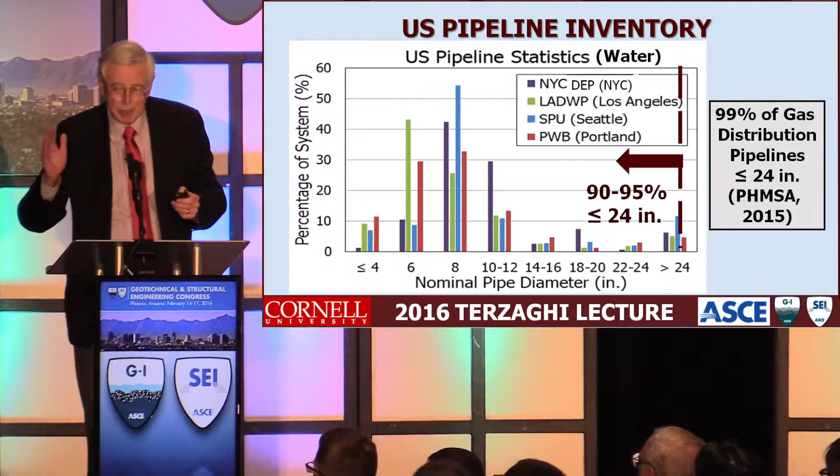Similar statistics can be gotten from the PHMSA, Pipeline and Hazardous Materials Safety Administration, and they have done statistics on the gas distribution pipelines in the United States - 99% of them are less than or equal to 24. The larger ones, of course, are some of the greater and more important ones, but just to get the statistics right and a sense for the composition of the systems, I thought I'd lay these out because we'll show how they become important later on.

Pipelines are part of a national challenge to be able to manage and understand and work with our infrastructure and to make it a better infrastructure.

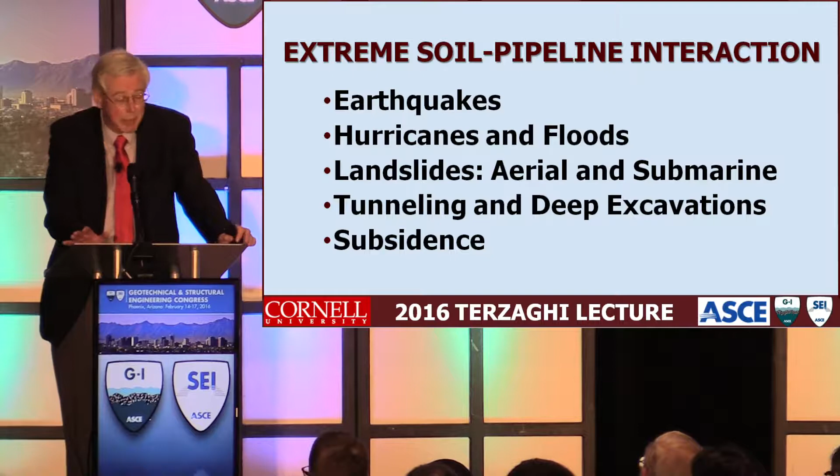We also have ground deformation effects associated with tunneling and deep excavations, and a whole variety of causes for subsidence. The work supported by the National Science Foundation and others on the effects of earthquakes and other extreme events on soil-pipeline interaction has value not only for extreme events, but also for everyday performance of pipelines subject to ground movements from tunneling, deep excavation, subsidence, and other disturbances.

So this kind of investment and activity goes a long way toward helping us understand and engineer better for what's underground.

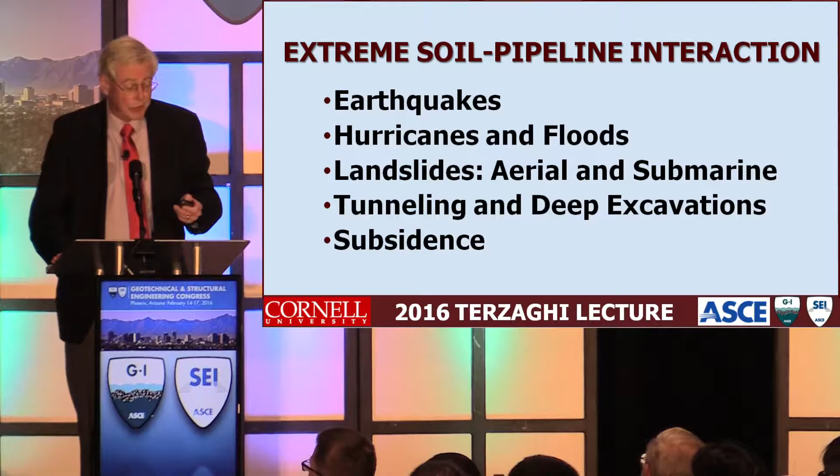Whenever we talk about extreme soil-pipeline interaction, two aspects automatically come to mind: material and geometric nonlinearities. This is a double-edged problem because we have material and geometric nonlinear properties for the soil, and simultaneously material and geometric nonlinear properties with respect to the pipeline structure. Probably the greatest challenge is the geometric nonlinearities, because when pipelines deform and the ground begins to fail along specific failure planes, you get complicated and complex behavior.

So I'm going to start on the technical part of this talk by looking at where the rubber meets the road, and that is where the soil and the pipeline meet.

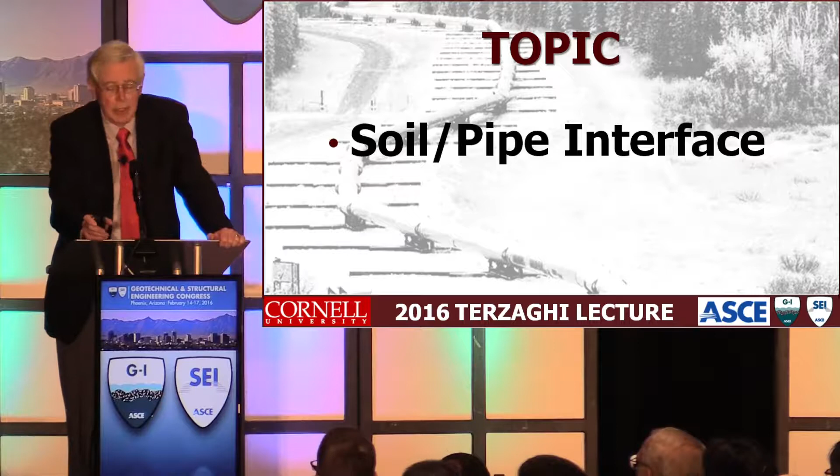We'll see some examples about that later. But they will eventually squeeze shut, and that'll be a function of what kind of pressure they're carrying. But often in an extreme event, we can't rely on the line to have pressure in it, because it could lose pressure from a variety of different operational or other failures in other parts of the system. So they really need to survive with low or zero pressure if they're going to maintain their integrity.

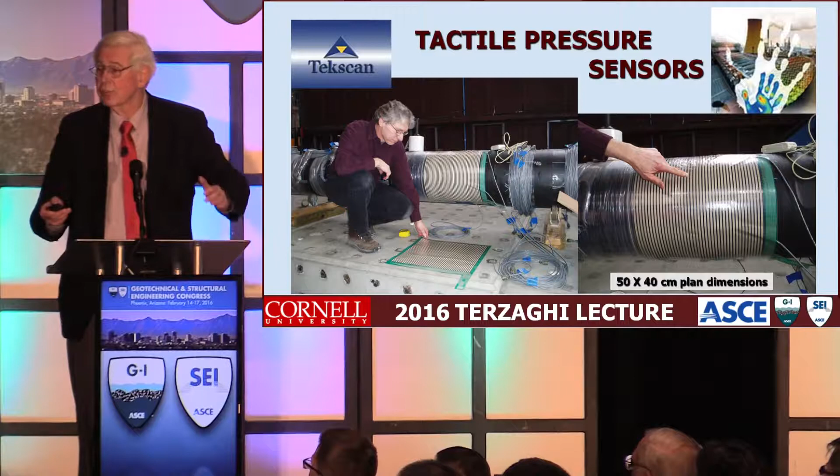These are electronic sensing units which will have voltage drops, which when we monitor them, we can come up with a pressure distribution and therefore actually measure the pressure distribution around nonlinear objects like pipelines under large ground deformation.

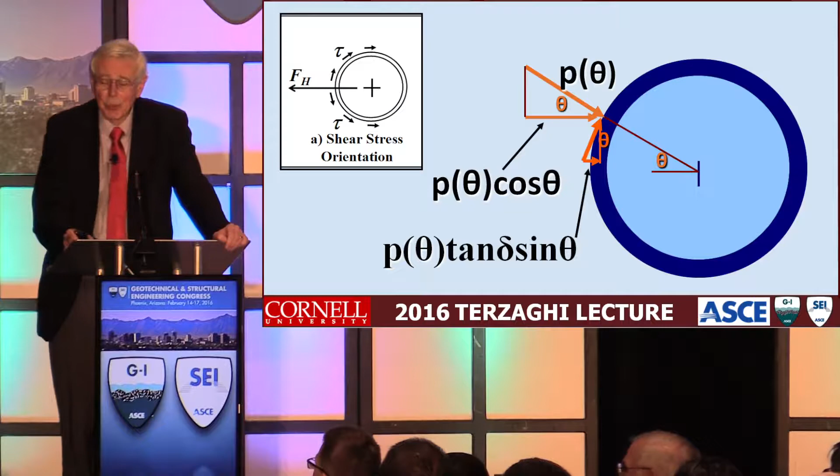And if you want to break that down into the horizontal pressures, then you have to decompose the normal force, which also generates a frictional force on that pipe. So there's a double decomposition to get the horizontal components, which is illustrated in this particular diagram.

You can integrate this. This is an equation that was originally developed by Mike O'Rourke, so I want to recognize him for doing that. We used it as our research team. It shows here you can integrate the horizontal components from those components which are perpendicular to the longitudinal axis of the pipe, from the normal force and also from the frictional force.

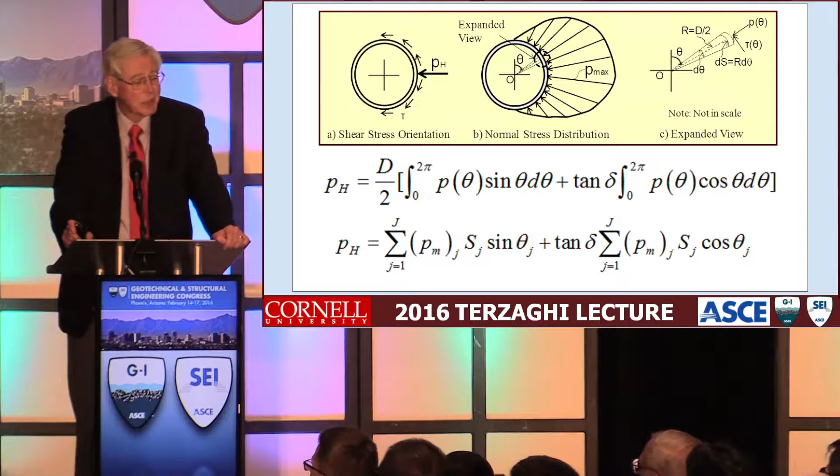And you can also do this in a numerical fashion by using the actual tactile pressure sensor data, which is the second equation there. And here's some examples of the pressure distributions that were monitored during some of these two-dimensional plane strain tests.

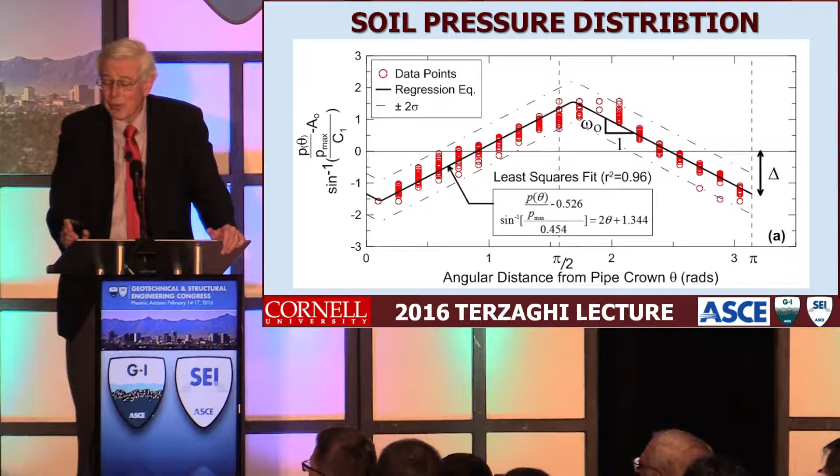What you can do with those data is you can take the data, you can put it into some form of regression that will fit the sinusoidal distribution of the data and be able to tag that with some moniker or metric of the statistical substantiation or stability of that. So we have an R squared of about 0.96.

You can see the black regression line. It's a very well-defined sinusoidal distribution. You can see the data ranges. We have about 17 or 18 different data sets shown in this particular slide.

And I think what's also quite interesting, and we'll come back to this later, is that there's numerical analysis that we've done. You can do the same thing with those. You can take the normal distributions to those and decompose them into the horizontal components. And they actually show a very good relationship too.

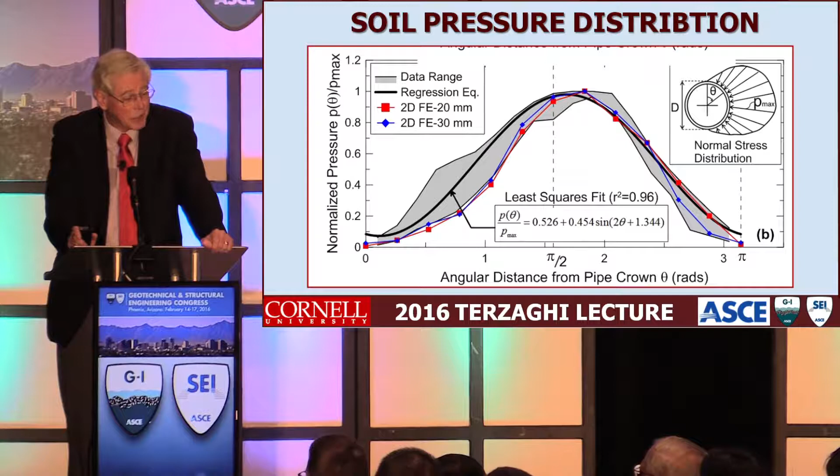So in this particular slide, what we've done is we've plotted the normalized pressure distribution. That is the pressure distribution divided by the maximum pressure, and you can see the good fit with respect to the sine function.

For lots of numerical reasons, when we roll these things up and do analyses, it becomes useful for us to be able to define what we would call an apparent frictional force, which would be generated by the horizontal force in this case, that P sub h, multiplied by the tangent of delta, where delta is the angle of soil-pipe interface friction, rather than to do the stress normal to the surface.

We have two ways that we can decompose our forces. We can decompose them perpendicular to the longitudinal axis of the pipe, or we can decompose them perpendicular to the surface of the pipe.

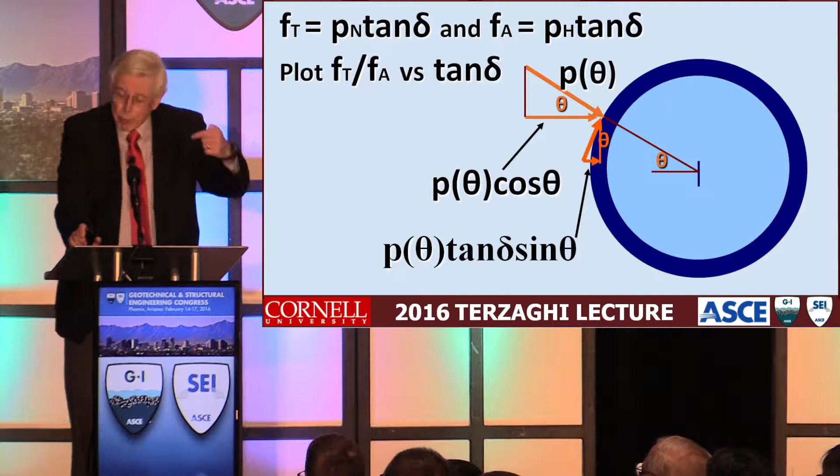But it's the one that decomposes perpendicular to the surface that generates the frictional resistance longitudinally. So if we want to couple all of this stuff, this is the way you couple it. You look at the relationship between the actual friction, which is longitudinal, that's F sub t, and the apparent friction, generated by the forces perpendicular to the longitudinal axis, and we can plot those because we've measured them very precisely, and this is the transfer function that you get.

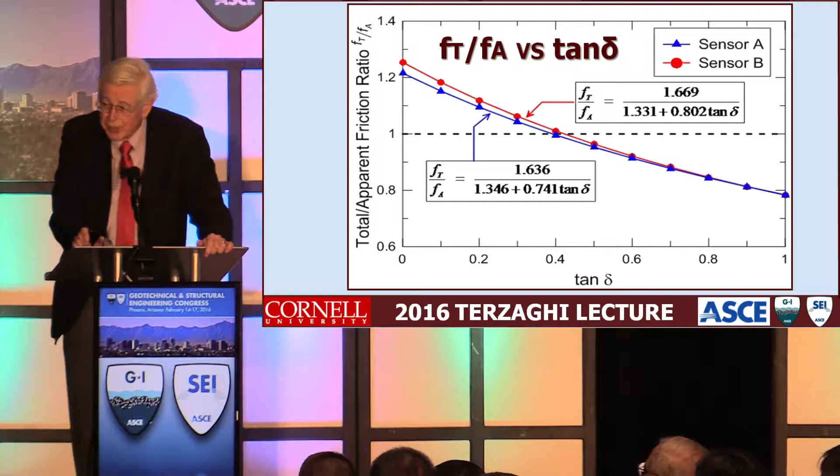You can use this dimensionless value, plotted as a function of the interface friction angle, and you can see that if you're testing a high-density polyethylene pipeline, which has a tan delta of around 0.4 or 0.5, you don't need a correction. The two are virtually identical. But if you're looking at a pipeline with a very high delta, close to 1, that's a very rough surface, and you're going to be overly conservative if you use the horizontal force to evaluate your friction.

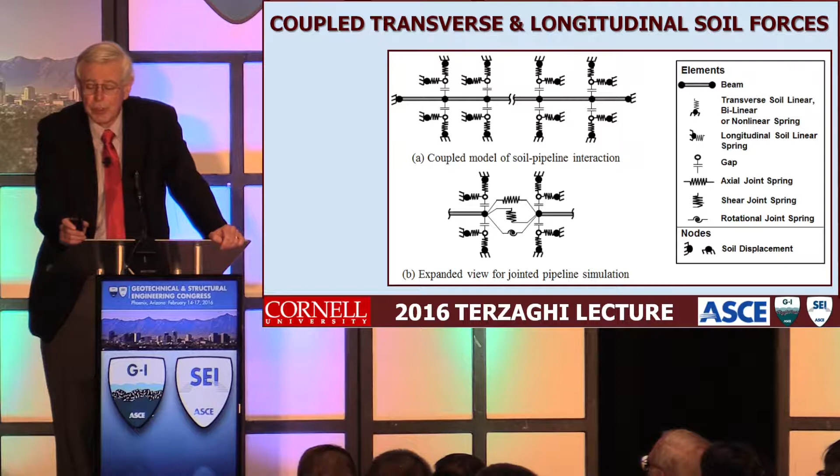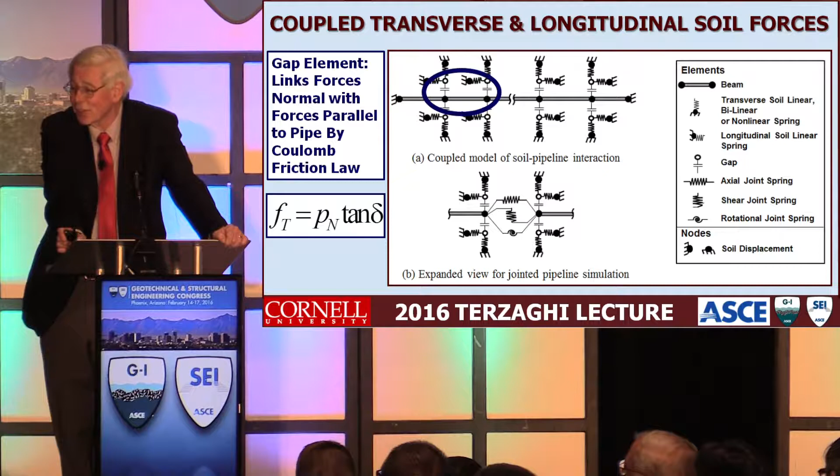So the first thing we learn from this ability to look at the interface, where the rubber meets the road between pipe and soil, is that we need to account for the coupled transverse and longitudinal soil forces. In the Terzaghi paper, we'll talk about how you can do that in Abaqus. Basically, you create gap elements linked with force relationships between the pipe and soil, perpendicular to the longitudinal axis of the pipeline. You couple it by virtue of the true friction normal to the surface of the pipe, so now you are truly accounting in two dimensions for the coupled forces perpendicular to the longitudinal axis and the frictional forces that develop longitudinally. If you don't do that, you will not have the right answer, and you can be very far off and unconservative.

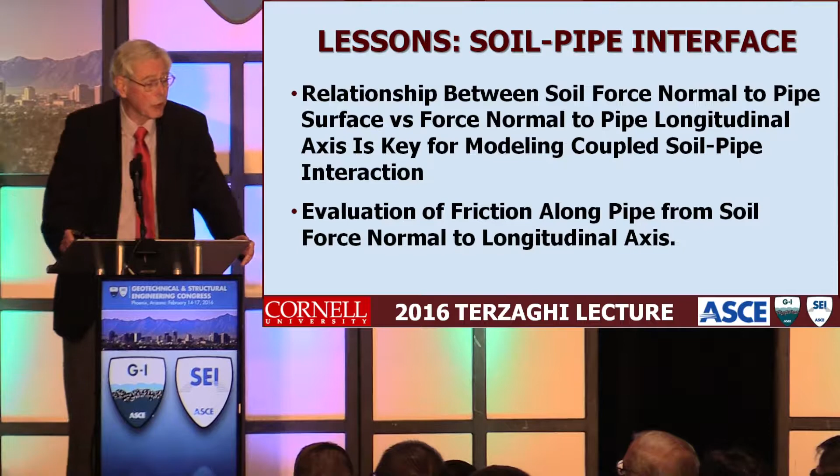So, first lesson: the soil pipe interface relationship between soil force normal to the pipe surface versus force normal to the pipe longitudinal axis is key for modeling coupled soil pipe interaction, and the evaluation of friction along the pipe from soil force normal to the longitudinal axis. We have provided a way to account for that.

Next topic is soil pipe interaction, pipeline interaction. To deal with this, we have a number of different ways. We can look at the pipe as a beam, a kind of quasi-L pile in a horizontal direction, and characterize interactions. I don't want to call these springs because they're far more complex now. They're nonlinear, they can account for strain softening behavior. You can pack a lot of detailed soil structure interaction into these, or make it very simple as a spring. We have the capacity to go far greater and do a much more sophisticated job, replicating very complex interactions in the pipe and in the soil.

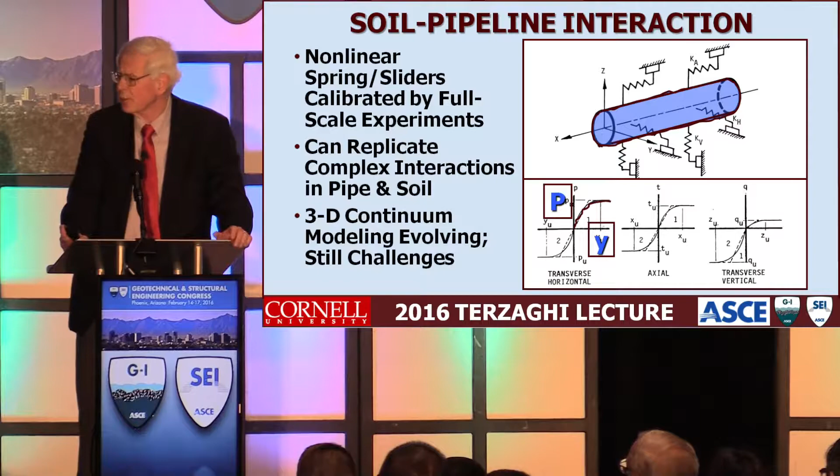And then there's also 3D continuum modeling, which is evolving. There are still challenges, but there's been extraordinary progress made in three-dimensional modeling too. This is a summary slide, putting some of this into perspective. It's obviously selective, not recognizing some good work from some good people, but given the time I have available, I'll illustrate some of these things.

We can actually look at the pipeline not as a beam, but as a shell. So you have shells which can be connected to these soil pipe interaction relationships, shown here by those graphics attached to the shell.

And then there are a number of very interesting works. Our colleagues at RPI and ourselves, with Xie et al., a paper in EERI in 2013, looked at a variety of different ways of modeling three-dimensional pipelines in solid soil conditions, modeling the pipe as a shell element and the soil as a solid. Recent work by Robert et al., work we did with the folks at Cambridge, Kenichi Soga—Dilan Robert is a professor at RMIT in Melbourne, Australia—looked at a variety of three-dimensional shell modelings, and some excellent work by Vazouras in Greece, looking at three-dimensional soil pipe interaction conditions.

When we characterize the strength of soil, we've always liked to use direct shear tests. That's because we're interested in two-dimensional plane strain reactions where we can get very good experimental data to validate what we're coming up with numerically. When you run a direct shear test carefully, you recognize that the direct shear relationship between shear and normal stress is not the plane of tangency to the Mohr circle.

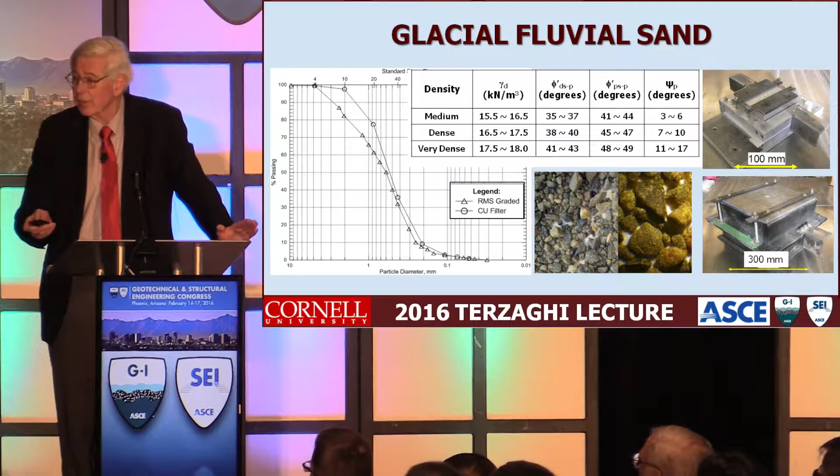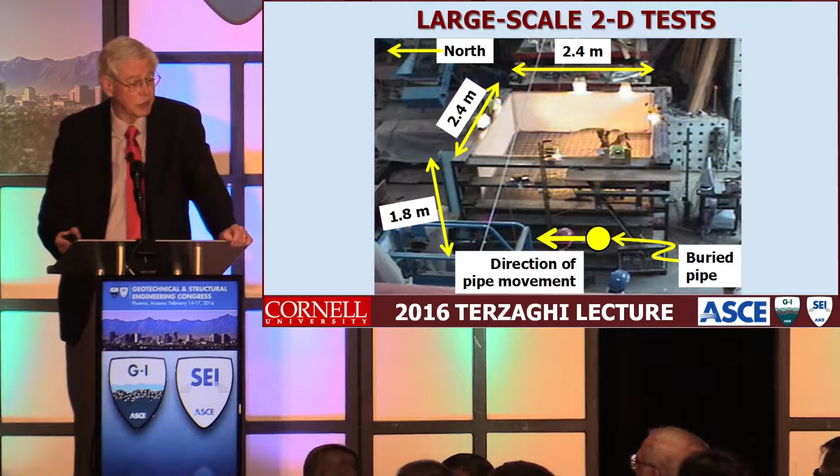That's because these are the kinds of soils we looked at—fundamentally, but still with specific characteristics, which you see on the screen. We developed two-dimensional models for these plane strain tests that we ran. This is just showing a picture of one of these plane strain tests.

Our analytical model worked off a Mohr-Coulomb yield surface. It had a strain-compatible modulus, and we also had a special subroutine for strain softening from peak shear, so it could account for strain softening situations.

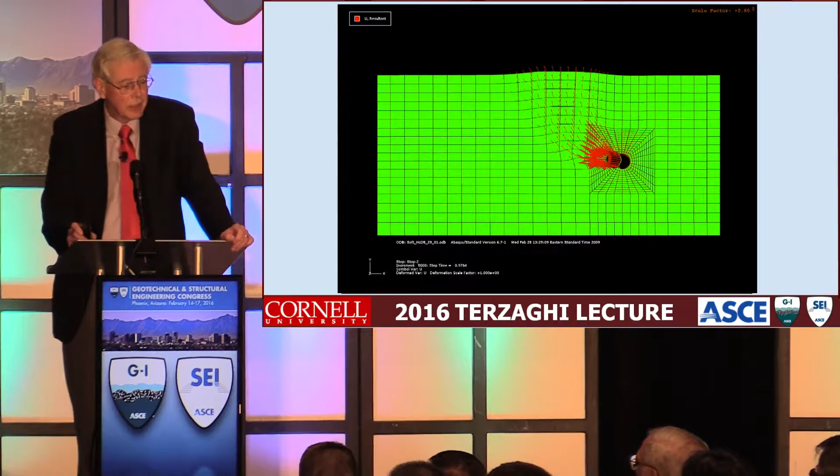In the next slide, you can see simulations with the pipe being pulled laterally through the ground. If we freeze that and look at the testing, the pipe pulls away from the soil in the analysis, and also in the tests, leaving a void—particularly when we're testing with partially saturated soils, which are really the right representation for the soils we account for in practice.

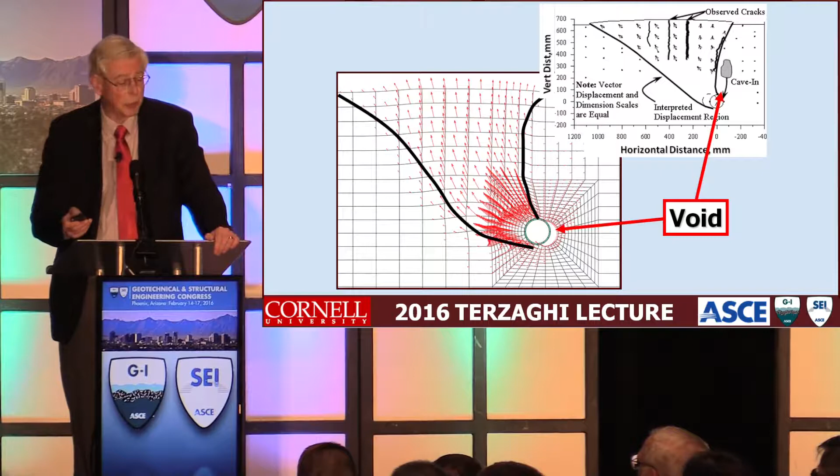When we compare the analytical results with experimental results, there's been excellent agreement, not only for tests associated with lateral pipe-soil interaction, but also vertical upward pipe-soil interaction—even to the extent we've developed an auto-remeshing approach that accounts for the pipe moving up in the soil as it begins to punch out of the ground, the reduction in vertical force, and how the relationship between pipe force and displacement should look.

So we can roll these up, and these have been published in various journals, including the Geotechnical Journal, Geotechnical Geoenvironmental Engineering Journal, and the Canadian Geotechnical Journal. And we can show these dimensionless forces, which are the forces we measured, divided by the unit weight of the soil, the depth of the center line of the pipe, the diameter of the pipe, and the length of the pipe.

And if we take the length as a unit length, you can get the force per linear distance. And we plot these relative to a dimensionless depth, which is the depth of center line divided by the diameter, and can come up with relationships that allow us to predict what the maximum forces are going to be on the pipe.

Now, there's something really interesting in this picture, particularly the one on the left, because what you'll see in that orange line are the partially saturated tests we performed at Cornell, along with the dry soil tests. And for the same soil with the same dry density, you can see that the partially saturated medium dense curve is higher than the medium density dry sand curve.

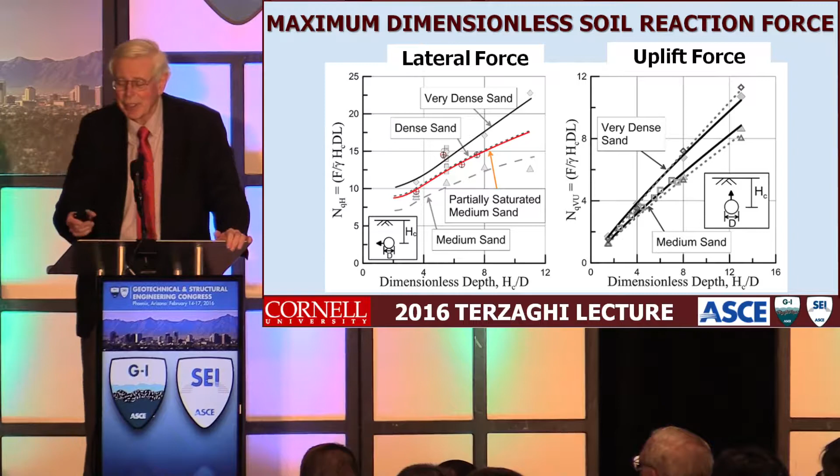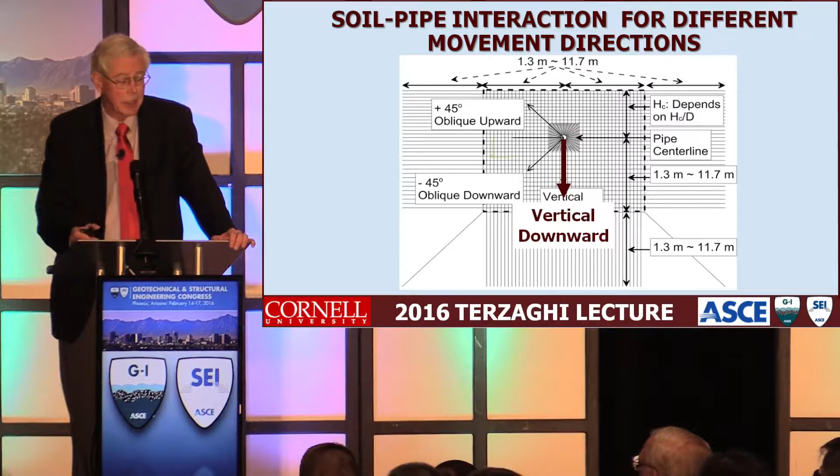We can go further with this model, having validated it in the two directions we've tested intensely and feel comfortable with the model. We now can look at pipe-soil interaction in the vertical direction downward, in the oblique directions. We can do a full 360-degree sweep to be able to come up with a characterization of the soil-pipe interaction for any direction at any depth in the soil. And that's what we did.

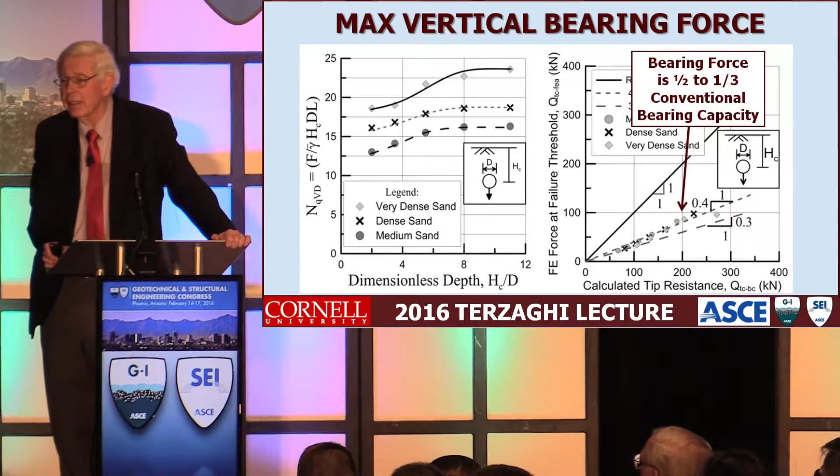We started off with the vertical, and when we ran the vertical, you can see on the left-hand side the dimensionless force plotted with respect to the dimensionless depth for the vertical reaction, and then we also could compare that vertical reaction with the conventional bearing capacity equations, which are very often advocated and used in design. And we did that. We found out that systematically the actual forces we were modeling were less than what's given by the conventional bearing capacity formulations.

And I must say that these are partially verified experimentally, and that's by centrifuge test, and certainly make good sense to us from a numerical simulation point of view, but this is an area where we could actually use some large-scale validation also to finally close out this particular pursuit.

However, taking that, which is interesting, we also can look at the oblique soil pipe interactions. These are 45 degrees downward, 45 degrees upward. And we actually could run through all of these different orientations numerically, and we can characterize the force generated as a maximum against the pipe for any interaction mode. That's what that I sub m stands for in that equation.

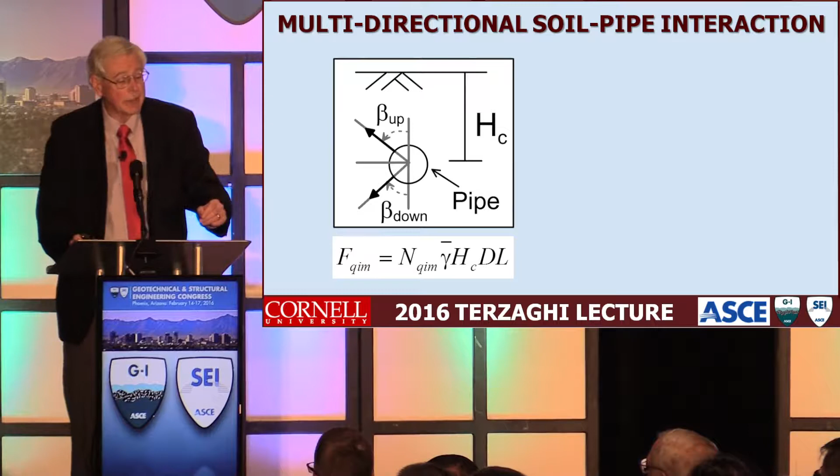And we can characterize that by virtue of this dimensionless number, this N sub q i m, multiplied by the effective stress unit weight of the soil, the height or depth to the center line of the pipe, and the diameter of the pipe. And what we found, if you look at this, for example, as a sort of random orientation, is...

We actually can account for it in an equation, and this equation actually comes from work done by Ken Nyman, who borrowed this from Meyerhof. You actually only need to define the force on the top of the pipe, that is the vertical upward, the lateral, which is the same in both directions, and the base.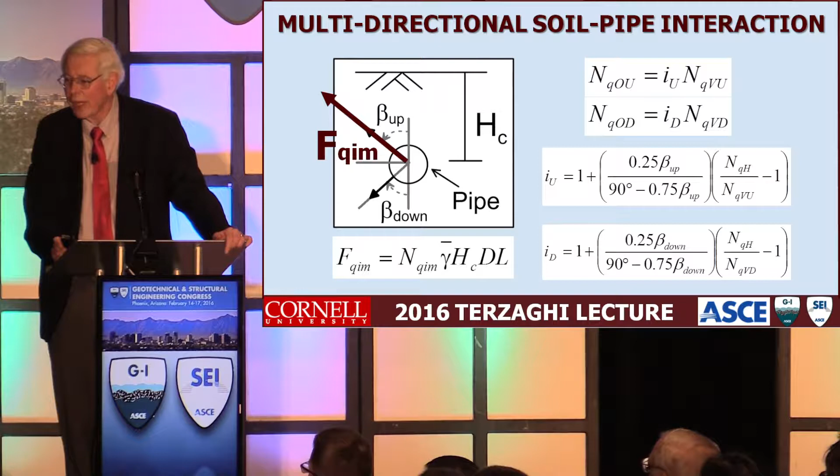And by these equations, you can account for the variation in maximum load 360 degrees around the pipe. So you even can boil this down to a set of very easily manipulable equations by just knowing what the reactions are at 4 points around the circumference of the pipe. And that's really a significant recognition.

These are showing a kind of summary of these analytical results for the ratio of the N sub Q, that is the reaction, dimensionless reaction number for the pipe in any direction, normalized by the horizontal, because we have so much good horizontal data from the large-scale tests. And what you can see over on the left-hand side is the 360-degree plot of that ratio.

And you could see when the dimensionless depth is shallow, so that HC over D is 3.5 in that upper left-hand corner plot, you can see that it's a very asymmetric distribution, 360 degrees around the pipe.

Because you're so close to the surface, the uplift force is very small when normalized with respect to the horizontal, and the vertical is still pretty high. But as we continue to go deeper through the soil, by the time we're getting to depth-to-diameter ratios of around 30, you're getting into a circular uniformity.

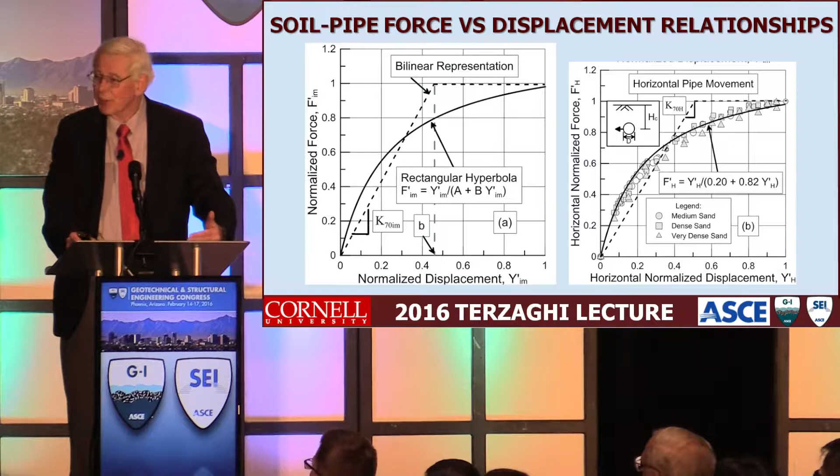At depth, you should not be able to distinguish horizontal from vertical. So we have the opportunity now to have a comprehensive methodology that looks at the interactions in the full 360 degrees. We also can characterize the force-displacement relationships using rectangular hyperbola. That's a great way to fit nonlinear things, and we use it all the time. In the Terzaghi paper, you'll see we've provided equations predicated on this rectangular hyperbola to characterize the force-displacement relationship as well as the maximum force in any given direction at any given depth.

Now that brings me to soil suction. We depend upon soil suction all the time for the stability of the ground, because if everything was dry, we would have just the friction we were supposed to have, right? But really, what happens is we live in the vadose zone. Many areas will have partially saturated or unsaturated soil conditions, and that apparent cohesion keeps things going. It's when that breaks down that we get surprises, and we get landslides and things of that sort at times. That works to our benefit, but when we're characterizing the reaction between pipes and soil, it works to our detriment because it adds to the resistance.

So the most recent work we've done with our colleagues at Cambridge, with Dylan Robert and Kenichi Soga and others, allows us to develop a simplified way to account for the effects of suction. I'm going to show it to you in this colored chart. On this chart are the class 2 and 3 boundaries of fill in the ASTM recommendations or standards. So if you're using class 2 and 3 fills, which are specified for burial of pipelines, those are the black lines. As the grain sizes go from left to right, your potential for suction goes higher.

Now what we did in our models is define it for the degree of saturation and maximum suction. I don't know what the degree of saturation is going to be for your pipe in the field, so we defined it as a maximum to get the worst case, and then you have to use some engineering judgment or additional evaluation from there to account for the suction effects. But you should never neglect them.

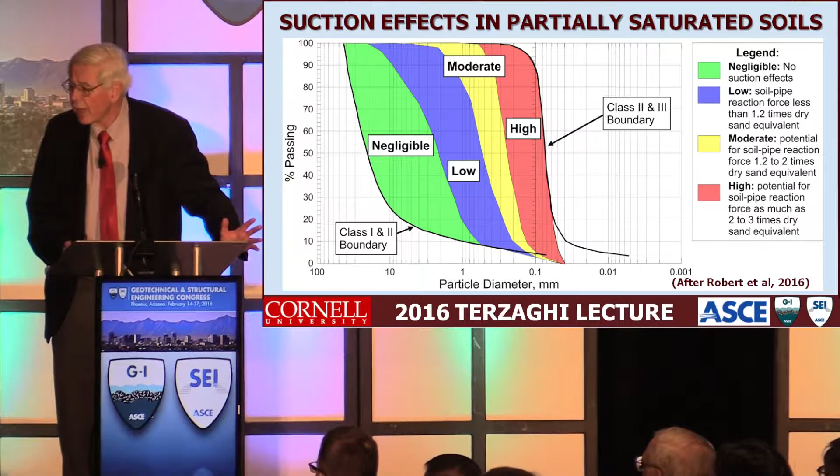For example, if you look here, if we go to the low zone, in this case the soil-pipe reaction force may be 1.2 times higher for the soil suction conditions. Going over to that red zone, it could be 2 to 3 times higher. One of the practical benefits from this curve is that if you go to the left of the blue zone, none of that develops suction any higher than a dry sand, so you don't need to make any corrections. If you want to dig a trench with sloping sides and fill it with material that has those characteristics, you're not going to get suction effects. If you get into the finer grain size, you do need to consider suction and take that into consideration.

This leads us to a design chart where we specify various characteristics for the pipe, and we ask ourselves, given the dimensionless depth, does the pipe size have any effect? And of course it does. Because if you were to take a depth-to-diameter ratio of 2, and you were to have a 1-foot diameter pipe, you'd then have a depth for that pipe of 2 feet. If it was 6 feet, it would be 12 feet.

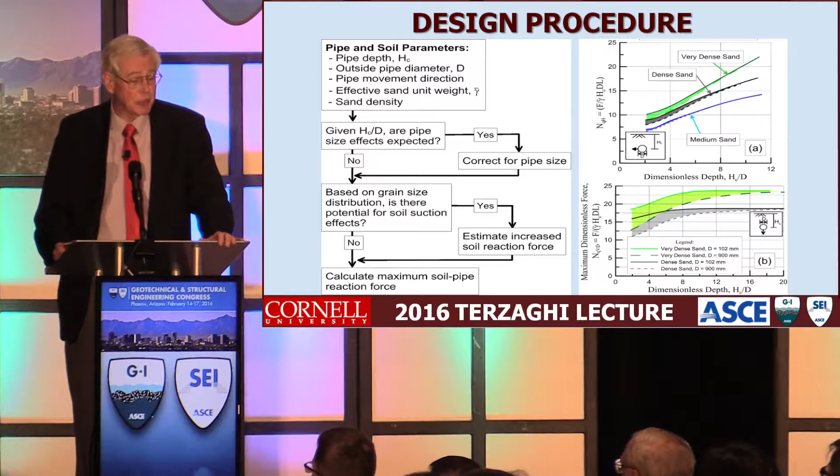The confining stress with depth suppresses the angle of dilatancy, and therefore your peak shearing resistance will decline. Our model accounts for that because through direct shear we break this down into the angle of dilatancy components for different levels of stress, and those corrections are shown on the graphs I'm presenting here. In the upward direction we don't see the effect. For the downward direction we see a significant effect, and for the horizontal it's important to consider many times.

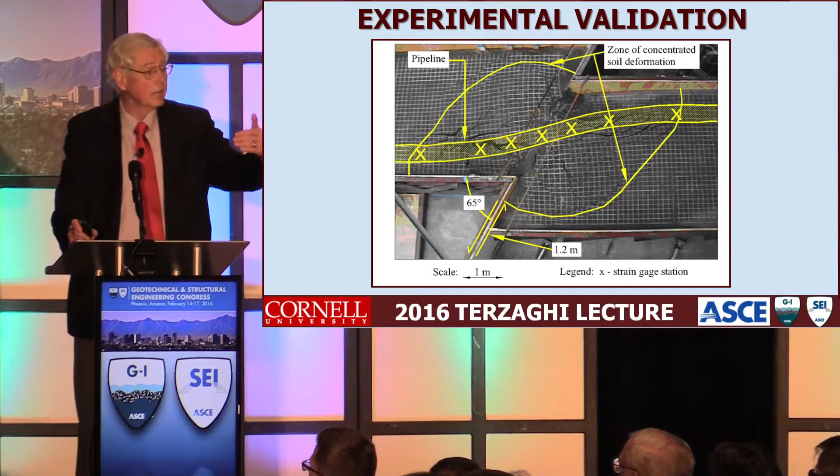So now we go back to taking this model and looking at it from an experimental validation perspective. If we look at some of our large-scale tests of a 250 millimeter diameter high density polyethylene pipe.

What I'm showing here are the measured experimental results relative to the analytical results if you didn't consider the coupled soil friction normal force relationships. That is, if you just took the K0 conditions that are in the pipe prior to the ground rupture event, you can see that they are under-predicting.

These are left lateral strike-slip fault experiments, and they generate a lot of force normal to the surface of the pipe, amplifying the friction where that normal force is occurring. When you couple the two, you properly account for that amplified friction and therefore the strain attenuation that has to occur at the center of the ground rupture.

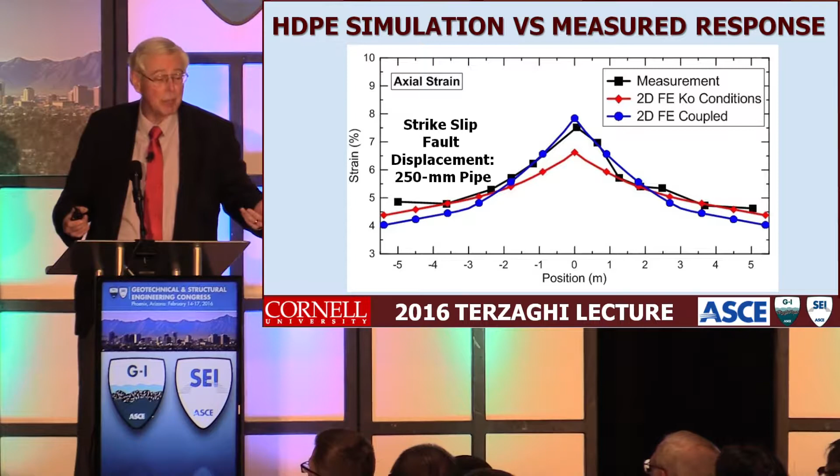Again, you get a good agreement between the measurements and the actual analytical results.

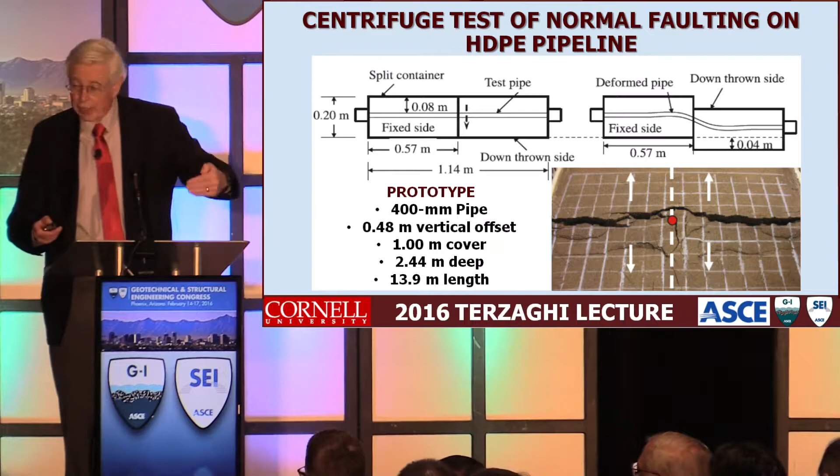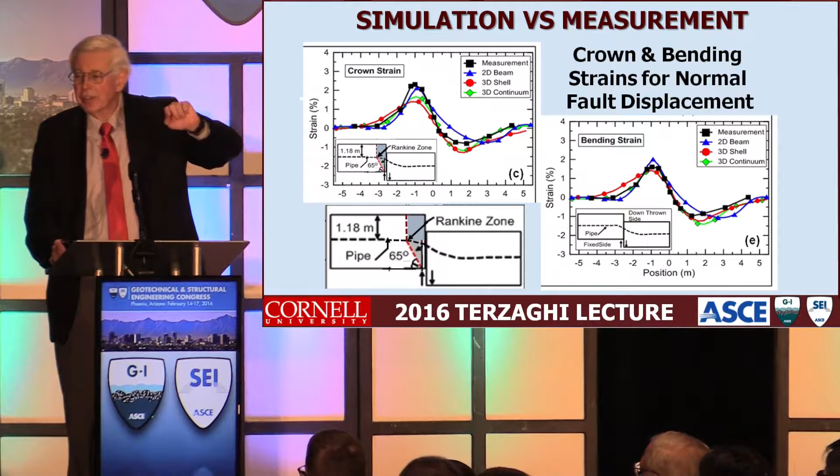We also looked at the fault displacement not as an abrupt movement, but because when you develop a Rankine zone there—anytime you have a normal fault, you're getting an active condition as the down-thrown side moves relative to the up-thrown side—if you distribute your movement across that zone, consistent with the photograph we just saw, you get excellent agreement from the two-dimensional model that compares very well with the three-dimensional analyses shown and presented in that paper.

So, lessons on soil pipeline interaction: we have an integrated methodology for soil pipe interaction for all pipe movement directions and depths, where the height relative to the diameter—not the diameter relative to the height—is greater than...

There's always a typo somewhere, always. I hope this is the last one we see. That should be HC over D.

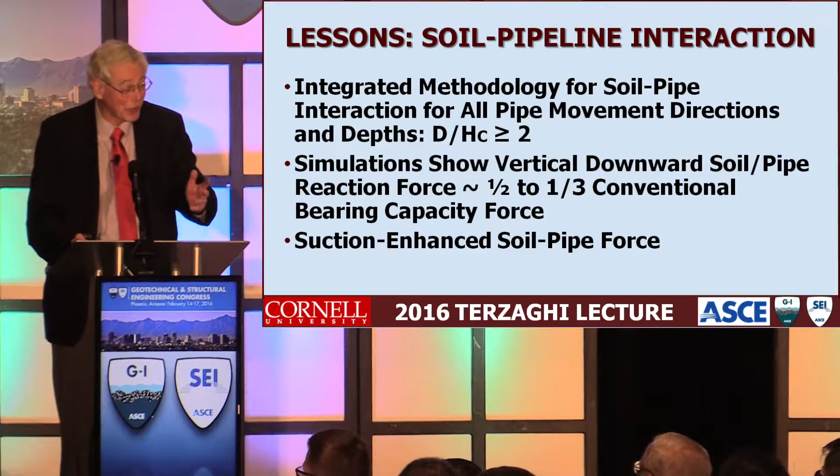So simulations show that vertical downward soil pipe reaction forces are about one-half to one-third the conventional values. That's a very important observation. And of course we have to account for suction-enhanced soil pipe forces.

Now there's a very interesting issue about when we can use two-dimensional analysis and get great results, and when we can't. So we took the knowledge we had from our pressure distributions and tactile pressure sensors, and we created a simply supported beam from a number of pipes evaluated as shells, applying that pressure to it as a proxy.

When you actually have soil pipe interaction, the pressure is not a following pressure—it's an intermediary pressure as the soil struggles with the pipe to create some interface pressure at every aspect of the deformation between the two. But in this case, we're looking at it as a following force, because if it becomes unstable under a following force due to lateral or transverse deformation, we clearly have to worry about the three-dimensional aspects of things.

So we looked at steel—specifically X52 steel, which we've studied and used because the pipelines at LADWP are fabricated with that material, and we have a great relationship with them. We also looked at cast iron, because pipelines in urban environments are affected, and cast iron is the most fragile and most problematic. You can look at these cast iron pipelines, again, with a rectangular hyperbola.

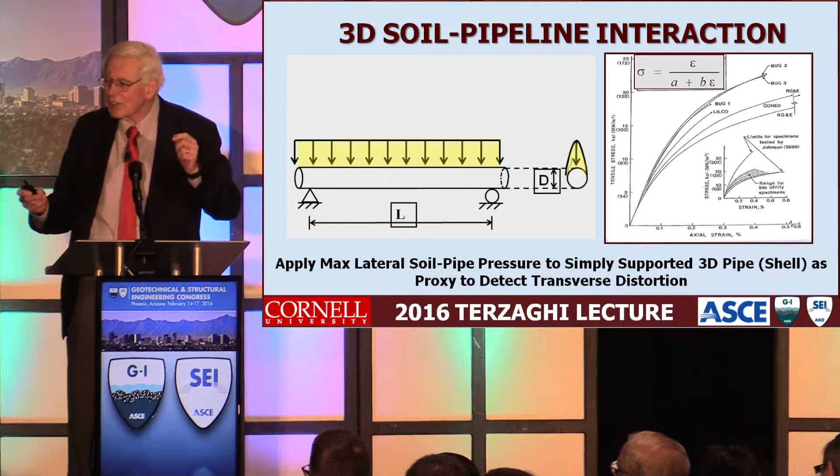When you look at cast iron, even though it's brittle, you should look at it as strain-based. Pipelines which are ductile clearly have to be looked at as strain-based, but even brittle ones too. We did tests of a pipe that came out of the ground after being there 50 to 100 years, and these are the tensile stress-strain relationships. Some of them are failing at about 0.25 to 0.3%, about 2,500 to 3,000 microstrains. So we don't like to see strains in cast iron go much higher than about 600, and certainly no higher than 1,000 microstrain.

When we look at these steel, HDPE, and cast iron pipes, we look at them not only from that simple model of beam loading, but to prove that model gives a reasonable representation of soil-pipeline interaction, we ran analyses for pipelines crossed perpendicularly by a fault. What you see here is the pipe nominal diameter plotted on the horizontal axis, and the diametrical strain—delta D over D, the change in diameter relative to the original—plotted on the vertical axis, at about 24 inches for both cast iron and steel.

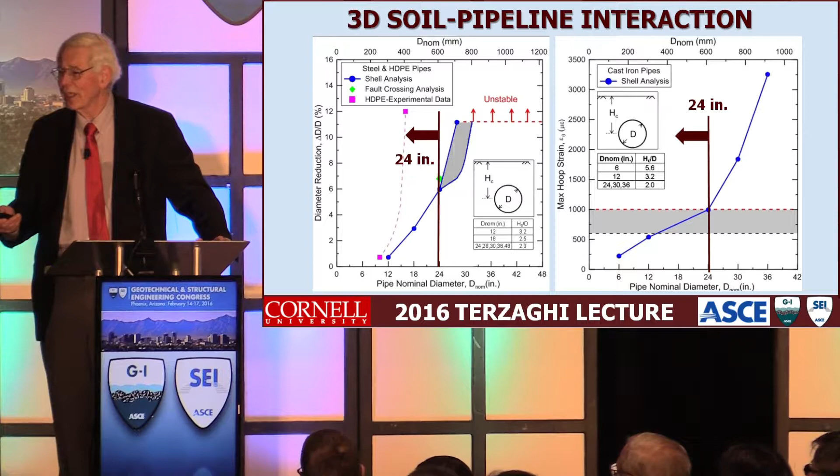As we go from 24 to 30 inches, it becomes unstable—you actually start to get transverse ovaling, which will eventually cause collapse or crushing of the pipe. If we take that as a representative condition where three-dimensional effects really have to be worried about, we can say that at 24 inches or below, you can get a really good model out of the beams. But at 24 inches or greater, regardless of your D over T, you've got to be careful about those conditions. These are some of the three-dimensional results.

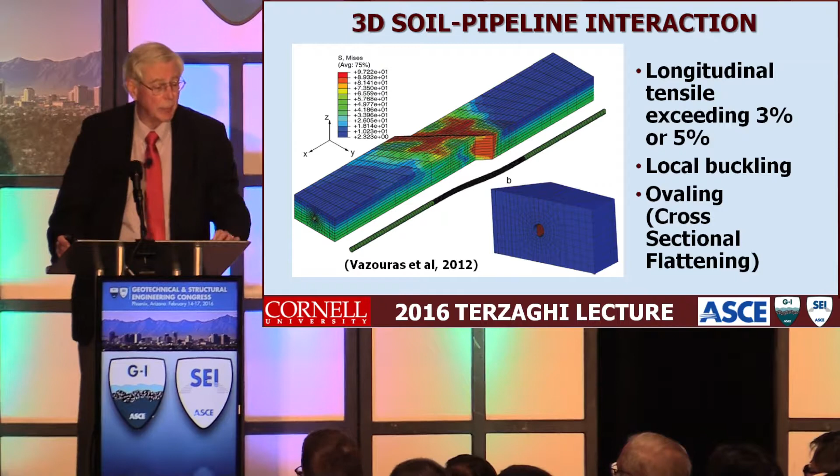I have to give credit to Vazouras and others for their excellent papers on this interaction between soil as a solid and the pipeline as a shell—they have a lot of good recommendations. Ahmed Nisar, who's here in the audience—thank you, Ahmed—also shared with me some of the analysis he did when he was at MMI. He's now working at his own company, Infrastructure1.

This was for the San Francisco Public Utilities Alameda Siphon number 4, which had to be designed across the Calaveras Fault, taking about 4 feet of deformation. They found that ovaling really controlled the design, so they had to do three-dimensional analyses until they got to a wall thickness that could keep the ovaling to a reasonable level. So we see this dichotomy in the analysis, and I hope this paper will provide some guidance on when you need one kind of modeling versus another.

So, 2D beam modeling provides effective soil-pipeline interaction modeling, especially for diameters less than or equal to 24 inches—less than or equal to about 16 inches for high-density polyethylene. And we need to consider transverse pipe distortion when we're at 24 inches or larger for cast iron and steel, and greater than 16 inches for high-density polyethylene.

Let's talk briefly about next-generation hazard-resilient pipelines. What you see there is a picture from the Wall Street Journal—that's Craig Davis from the Los Angeles Department of Water and Power. He's responsible for resilience there. In fact, they have a resilience mayor—Eric Garcetti is really leading the nation in creating resilience against hazards.

He went to the pipeline industry and asked if they could provide pipelines able to absorb some of the large ground deformation expected during an earthquake, and they couldn't provide it. Since he'd gone to Japan a lot, he turned to the Japanese and gave a big order to Kubota Pipe, who started providing pipe. That generated an incredible response from industries worldwide, and what you'll see next are a number of different innovations in geometric nonlinear accommodation of pipelines from various companies—we're testing them all at Cornell.

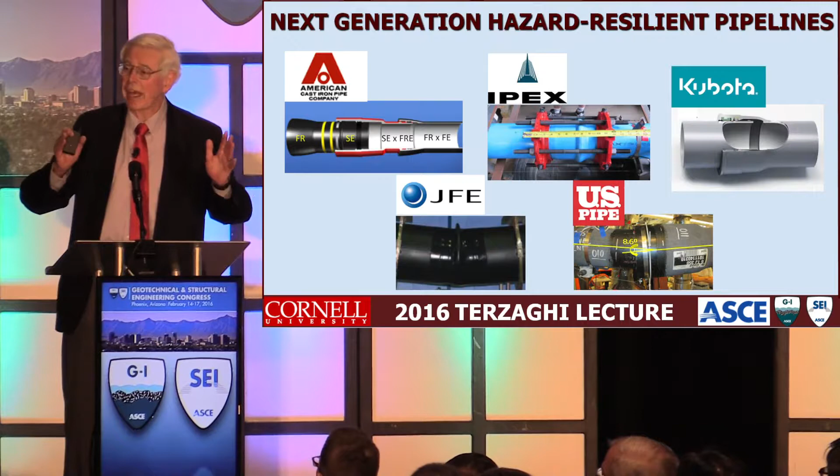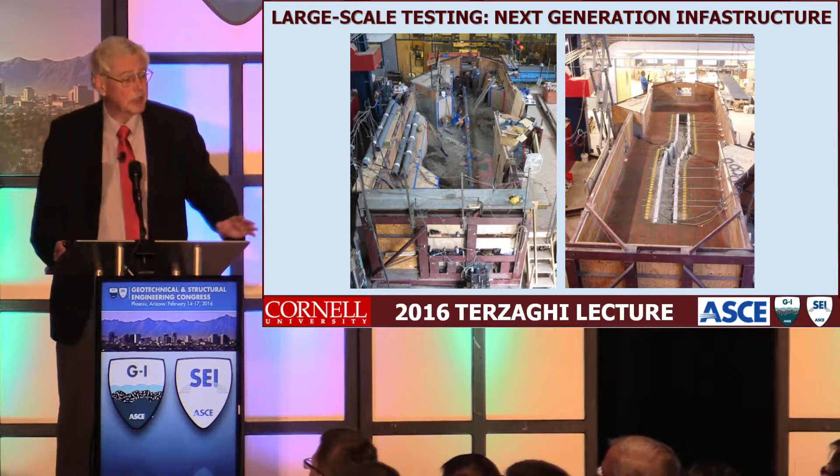Thanks to NSF and having our large-scale facility, we're the group that's actually validating each one of these and able to provide information directly to the water utilities, and all of this information will be up on our website. So you can see some of the pictures of the large-scale testing at Cornell.

There's some really interesting aspects about the next generation of hazard resilient pipelines. This is a picture of one of these expanded bells. These bells will actually move and then grab, so they accommodate axial extension, they accommodate additional rotation so they can accommodate bending, and they also can accommodate compression.

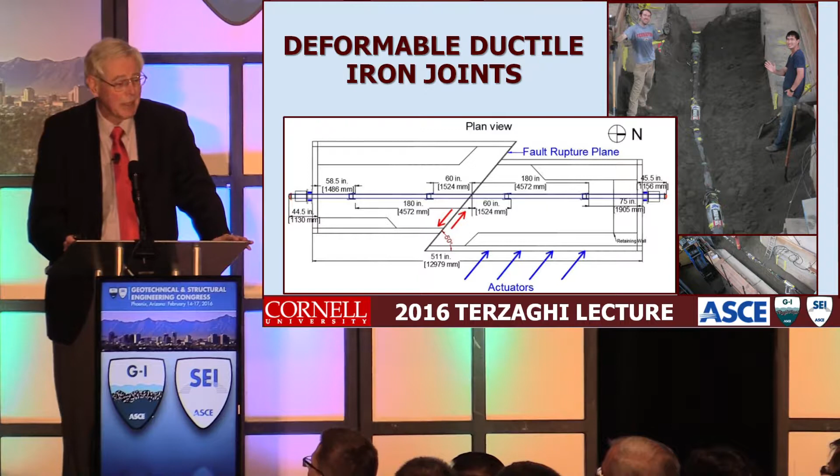Here's some of our graduate students, now postdoc Brad Wham and Pat. In the test box there, we're looking at US pipe type tests. You can see that these extra large bells that accommodate this deformation are bigger, much bigger. A normal bell is in the background there.

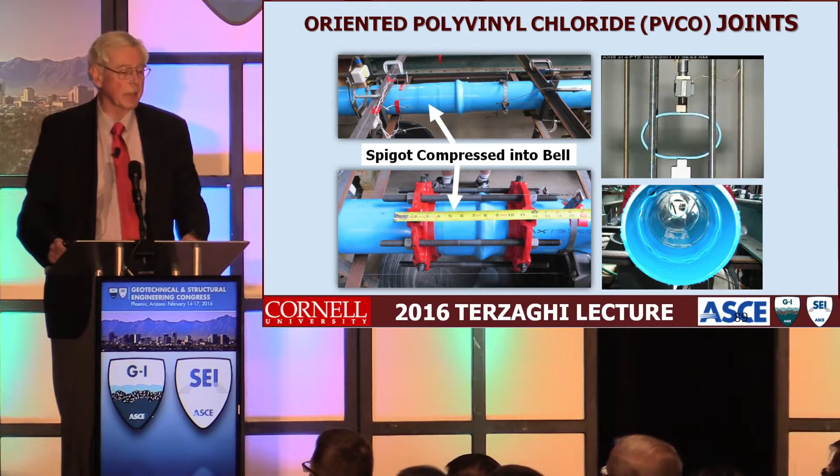This is a molecularly oriented polyvinyl chloride, and look at it being deformed over on the right. This is basically created by expanding a mandrel and getting all the molecules to orient themselves circumferentially. That increases the circumferential strength and allows them to reduce the wall thickness. The real key here is the reduction in wall thickness.

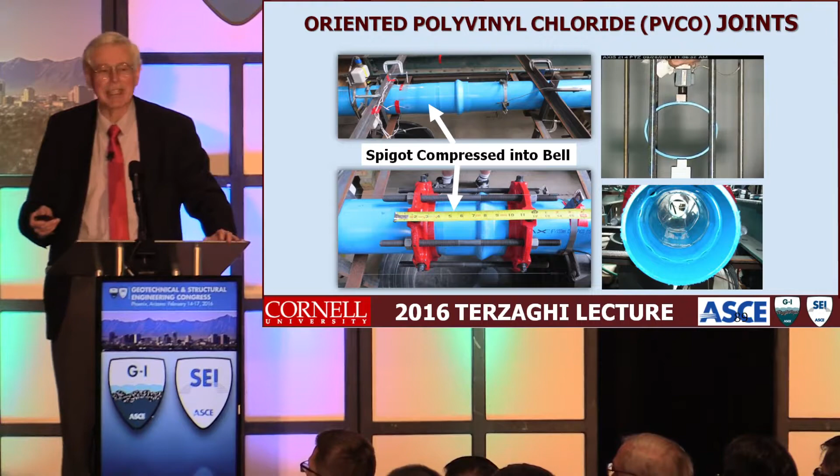And what that does, when we did our tests at Cornell, if you look at the pictures over here on the left, we did compression tests, and that thin spigot, when subject to compression, actually folds into the bell portion of the other side. It accommodates compression by collapsing into the bell, even with those restraints in place. Fascinating, and that's because of the reduced wall thickness from the molecularly oriented design.

So, lessons for next generation hazard resilient pipelines: there's been a paradigm shift in pipeline technology, and this is market-driven research funded by industry. And when you think about it, you really can't have resilience unless you have a market, because if you only have one supplier, you're not resilient to the economic situation that they could put you in. It's only having a choice that allows you to engineer both cost-effectively and technically effectively.

And in order to develop the next generation hazard resilient pipelines, you have to develop the next generation hazard resilient pipeline models, and that's what we're doing at Cornell, because somebody has to design these things afterwards.

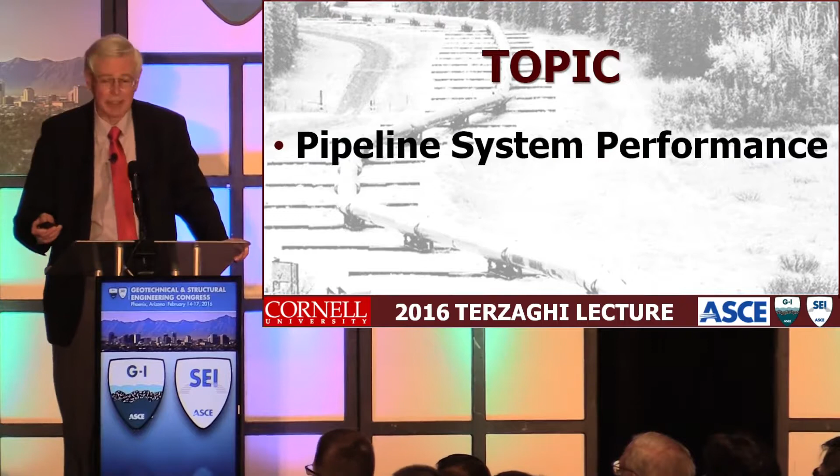All right, so finally, pipeline system performance. I'm going to talk a little bit about the Canterbury earthquake sequence. This was a sequence that's still going on. Everybody here probably knows that on Valentine's Day in Christchurch they had yet another earthquake, and we wish them well because they've had far too many for one community.

But this event has been truly extraordinary, not the least of which in that it has really stressed a modern society, with about $30 billion US dollars, to be 40 billion New Zealand dollars - 20% of their gross domestic product - as one of the repercussions of fixing up things after the sequence of earthquakes.

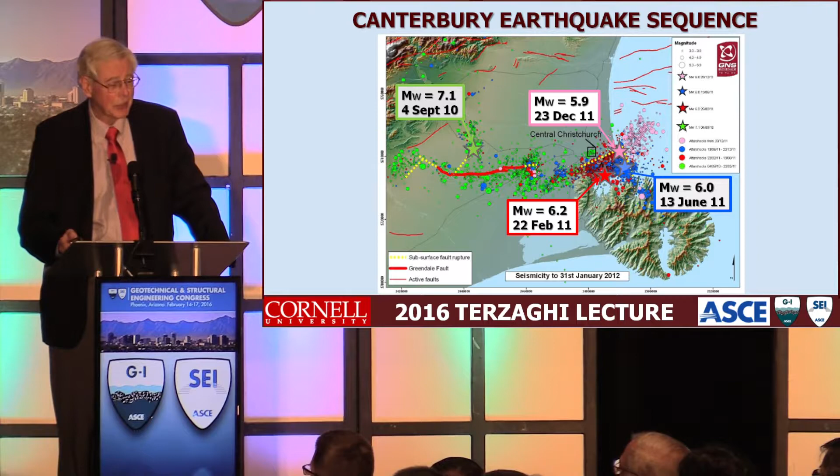So the sequence looked like this. On September 4th, 2010, there was the Darfield earthquake. Then there was the big Christchurch earthquake, which did all the destruction, destroyed the central business district of Christchurch, on 22nd February 2011. The 6th magnitude event on 13 June 2011. The Christmas Eve earthquake of December 23rd, 2011. And then most recently, this 14th February.

So a lot of people don't know a lot about Christchurch. So what we did is we created a special model - it's called the San Francisco scale. We could take the shapefiles of liquefaction from the 2011 February 22nd event, and we'll just move them right on to San Francisco.

So we now know how much liquefaction occurred in Christchurch. It was one Frisco large. And liquefaction is a big concern in San Francisco too. So we could learn a lot from New Zealand, and we are.

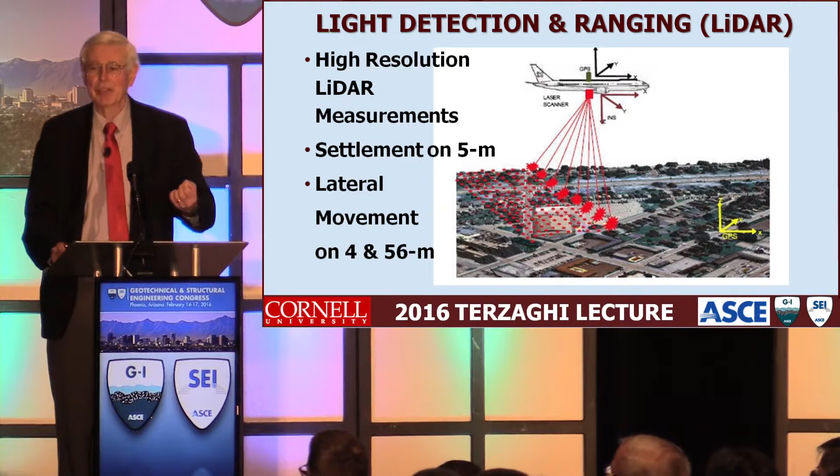One of the things we're learning, because they had the prescience to do this, was to run high resolution LiDAR before and after each event, so we can get lateral deformations associated with each event in the liquefaction zones and vertical deformations after each event in the liquefaction zones. We can then use the lateral and the vertical to go and do the kind of thing that Boscardin and Cording did for buildings, where we know that buildings subjected to ground movement, doesn't matter if this ground movement is created by an earthquake or a tunnel, a building's going to respond structurally the same way to the same kinds of distortions.

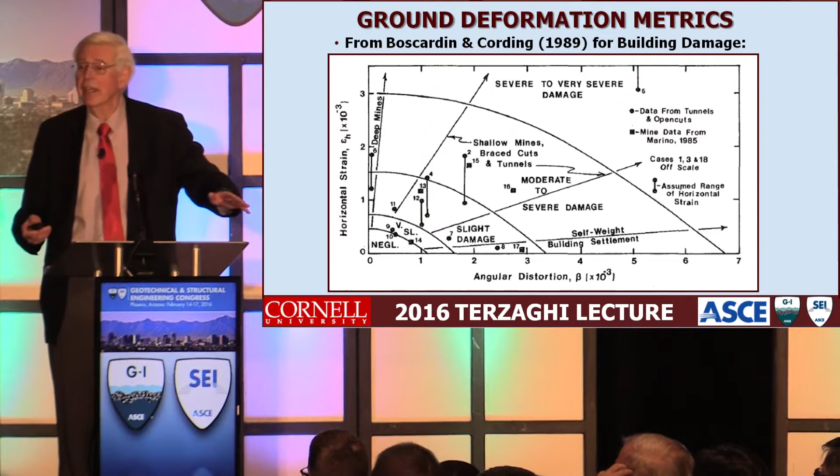So if we can characterize the deformation from liquefaction in terms of differential vertical by an angular distortion, dividing it by the distance between the two points, and similarly with a lateral strain, we can create a unified approach to ground movement effects both on structures and pipelines at the same time.

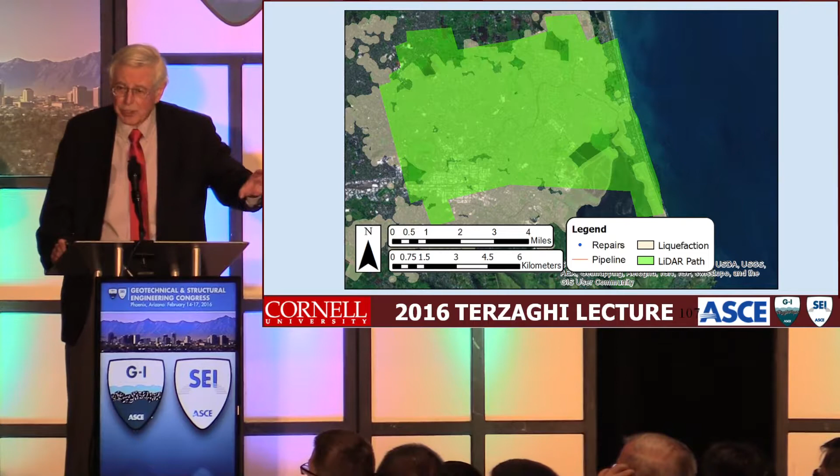So here's some of the kind of pipeline damage that was observed in Christchurch, massive damage in their water distribution system. So what we can do is we can take the LiDAR flights, we can superimpose them on GIS over the zones of map liquefaction. This is for the 22nd of February 2011 earthquake. We can put in the pipeline system because we have that all geocoded, and then we can put in the repairs to all the different types of pipelines at the same time.

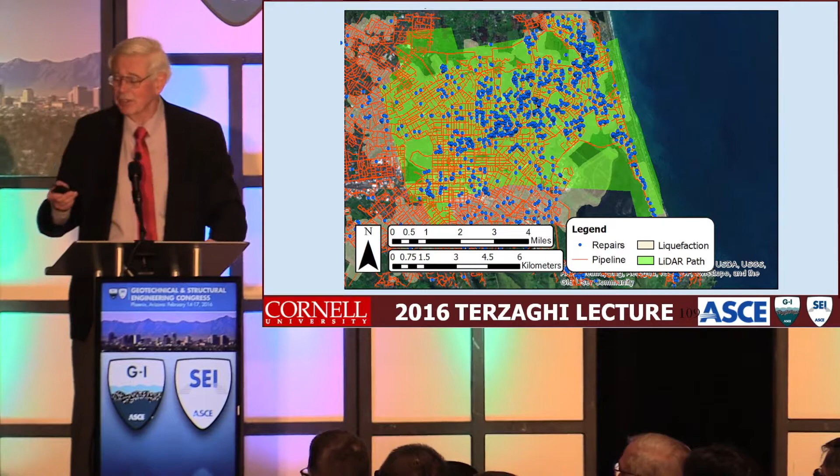So we can, for every level of lateral strain and angular distortion, roll up the number of repairs for a cast iron or asbestos cement pipeline and divide it by that increment of deformation by the number of pipeline kilometers that were available to be damaged, and we can get a repair rate relative to both angular and lateral strain.

And what you can see is an opportunity to screen, because you run into, when you're doing rolling up these big databases, the challenge of having too small a data set for the length of pipeline you have. So you have a statistic, you roll up a statistic which is statistically not significant or robust. And this allows you to define what's robust and not in your data set.

We defined the lateral strains because we're looking at high definition, high resolution lateral LiDAR data. That's on 4-meter spacings. The settlement is on 5-meter spacing. So you can create a rectangle, or you can create a square with 4 corners and do a finite element conversion to get the strains in that cell. And from that we can define a unique strain, which is the maximum compressive strain or the maximum tensile strain.

So it has the benefit. We don't know if that was the actual strain that the pipeline was oriented to, but it's the unique strain in that vicinity, and therefore, obviously, the damage must be correlated with it. And because it's unique and the other ones aren't, it's a really good parameter to use.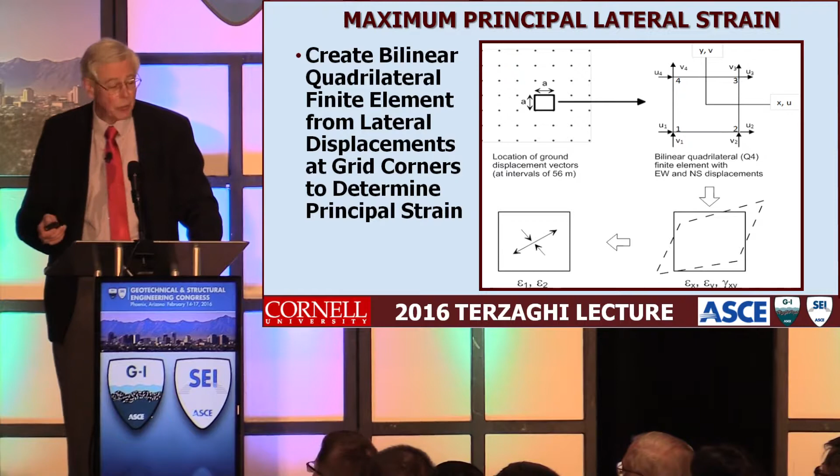So when you do that, when you roll these things up, you get these kinds of regressions, which have very respectable R-squares to them. That means, if you get an R-squared of 96%, that means 96% of the variability of the data is explained by that particular regression. And we can do that both for the angular distortion and for the lateral strains.

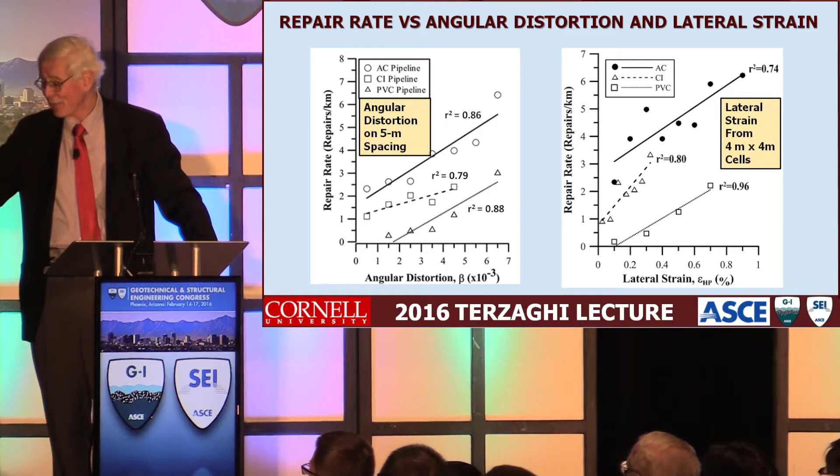You might ask, well, why isn't it, when it crosses, let's say for the lateral strain, the vertical axis, why do we get a repair rate? Because shouldn't it be zero when we have no lateral strain? Not necessarily, because there may have been part of the data set that got subjected to differential vertical. So you have to roll them both together to get the complete perspective on this. And that's what you see in this picture here. You have the lateral strains plotted with respect to the angular distortions, and then superimposed on these graphs, you have the various repair rates that one would predict based on the data set.

These, of course, are interpolations run on a linear basis. We could run nonlinear interpolations, but I think we're getting ahead of ourselves with over-precision in the mathematical formulations when you do that.

One of the interesting things about this plot is, if you look at the cast iron, we're actually looking at the repair rates, shown in these different colored zones, and their variability with respect to lateral strain and angular distortion. You'll see they're very sensitive to lateral strain, but not so sensitive to differential vertical settlement.

If I'd had time to give the part of the lecture on pipeline response to tunneling ground deformation, we've done 25 years of research on cast iron, which is a real mysterious material, and that's all laid out in there. You find that cast iron is very, very sensitive to lateral movement, and it can take a lot more differential rotation at the joints.

So that is quite consistent with what story you would have heard if we were talking about the tunneling effects on different pipelines.

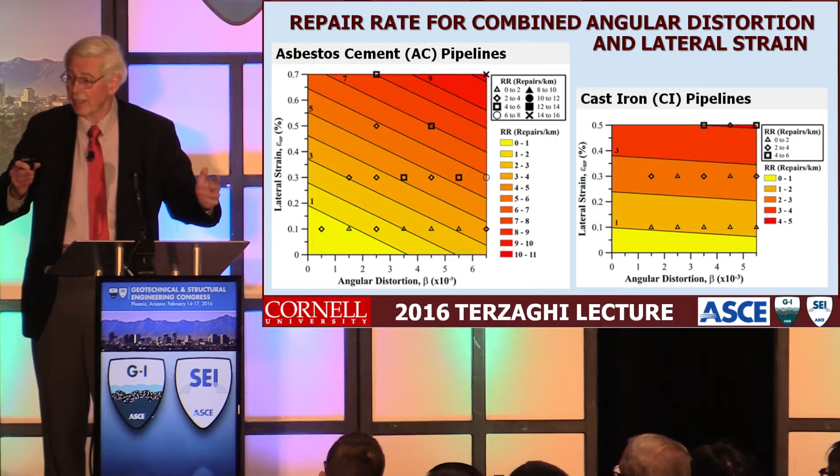We can also take the entire data set for Christchurch. That's for a particular LiDAR run in areas of liquefaction, maybe 4 million of these lateral strains, and about 3 million and change for the differential verticals, because those are on 5-meter spacings, the strains are on 4. We can characterize the cumulative distribution of strain for each earthquake, as you see in this plot here.

And we can look at what these next generation of hazard resilient pipelines are able to accommodate in terms of lateral strain if we put these joints in and set them at the right level at lengths of pipe between 20 and 15 feet, which is the preferred laying length for utilities in the field.

So if I show the range that can be achieved with this pipeline technology, it shows up right here. They're able to accommodate ground strains ranging from about 1.5 to 2% lateral strain, depending upon the length of pipe that you want to use.

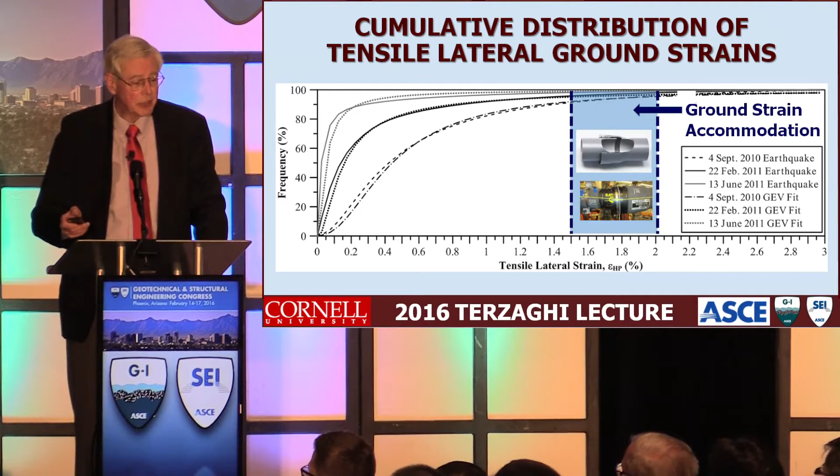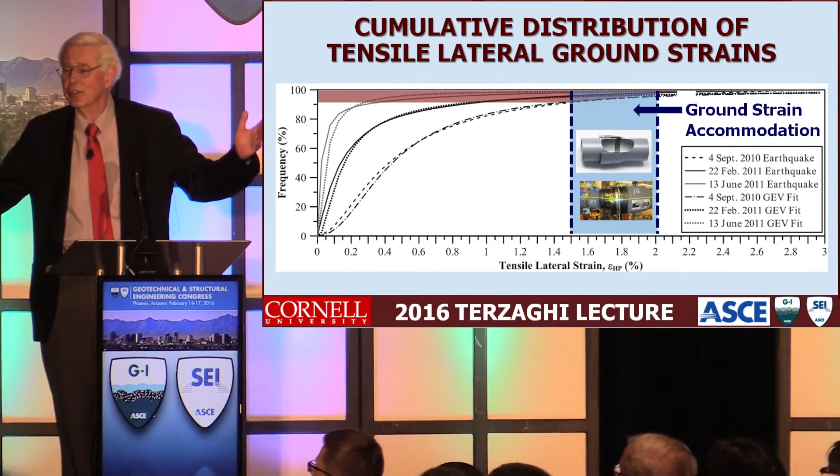Here's some of the kinds of pipelines that can accommodate that, sort of shown as a symbol. And that corresponds to these exceedance values for this large-scale field experiment in Christchurch.

So you can actually see that using this technology, you're able to accommodate 95% of the deformation that was generated in most of the Christchurch earthquakes taken as a single event. This gives utility operators a lot more confidence because we can relate it back to something real and quantified, so they understand the ramifications with respect to the performance of their systems. So there's the exceedance levels.

And then just to finish up, if anyone ever had a doubt about the resilience of polyethylene pipelines, we've been preaching that for years based on the tests we ran at Cornell. During the Christchurch earthquake, on the 22nd of February 2011, the one that really created the most liquefaction, what you see on the left is the areas of prominent liquefaction superimposed on the gas distribution system. This gas distribution system was medium density polyethylene.

It has virtually the same characteristics as high density, thermally fusion joined, so quite continuous and quite ductile. What you see on the right are the repairs for the water distribution system. There's about 1,700 kilometers of water distribution pipeline and about 1,700 repairs, a lot of repairs because of this earthquake. On the left-hand side with the gas, there's only 170 kilometers, but it's still in areas of pretty significant liquefaction and ground deformation. In fact, we know a couple of locations where they deformed quite a bit. And they both have the same pressures, both about the same diameters, both carrying about the same pressures.

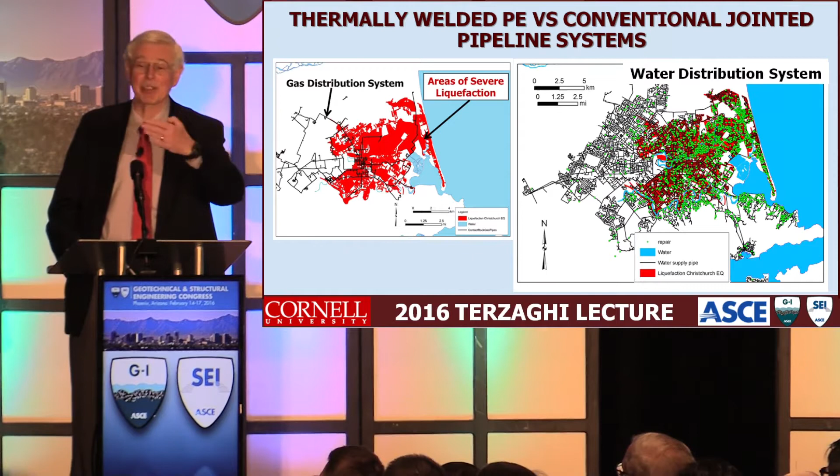There wasn't one repair in the medium density polyethylene system, not one, for all 4 of the earthquakes. Now, I haven't heard back from this recent one, but I doubt we'll find any from that either. Whereas the other one, just one earthquake, 1,700 repairs. So finally, an absolute irrefutable full-scale field experiment showing the ability of polyethylene pipelines to accommodate quite a lot of deformation, something the gas industry has known about, by the way, for quite a number of years.

So lessons from Christchurch: an extraordinary data set, multiple earthquakes. Imagine having the same infrastructure subjected again. Imagine living there, the poor folks.

This is really a hardship on them, but the data that has been produced will help people worldwide. This is the first-time comprehensive assessment of underground lifeline response to liquefaction-induced differential vertical movement and lateral strain, and a unified methodology for building and lifeline damage versus differential vertical and lateral ground movements.

Now, for the last part of the talk, which is impact on communities, I'm going to use San Francisco to illustrate this. San Francisco, as we just saw, is about the right size for liquefaction during the 22nd February 2011 earthquake in Christchurch.

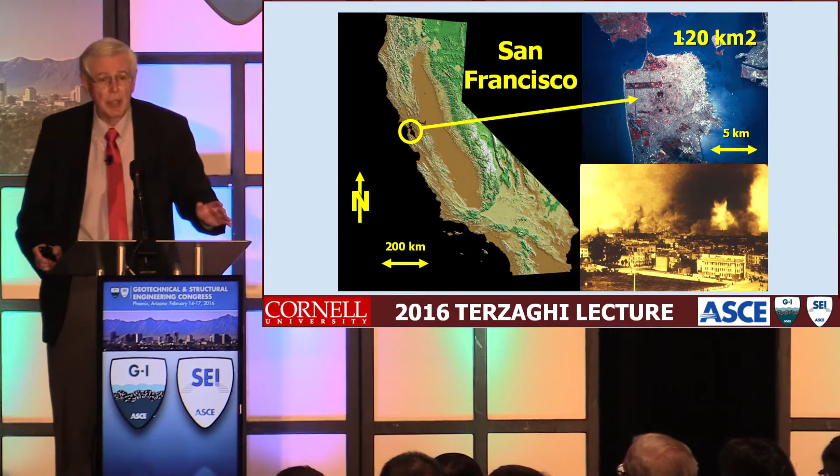97% of the building stock in San Francisco are timber-framed structures that are closely located relative to each other, and if a fire breaks out in one of those, within a half hour it's consumed the block. So fire following earthquake is the major threat in San Francisco, and in fact, San Francisco people know that because in 1906, 392 blocks of the city burned down.

It's still the largest single fire loss in United States history. Now, there have been bond issues passed in 2010 and 2014 to upgrade the auxiliary water supply system. This is a really major step forward. There's $400 million in each of these.

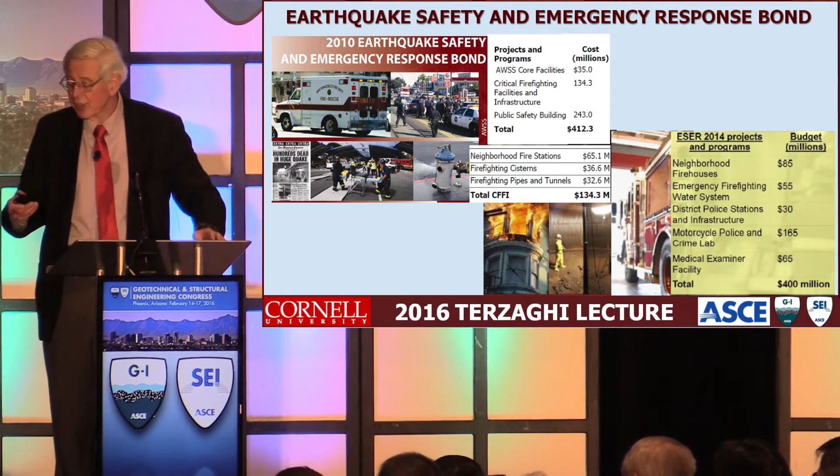And we helped with the simulation. In fact, we used the data from Christchurch to simulate repairs to the auxiliary water supply that would occur from the deterministic 7.8 magnitude earthquake in which they are upgrading relative to their system. And the way they chose to look at the performance of their system was to divide it into about 40 fire response areas. This is where the fire stations are located.

And if you want to do a good job with characterizing community response, you go to that community that knows the most about the response, that is the fire department. So this was a project that worked hand in hand with the fire department.

And what you see is fire demand, which was simulated by Charlie Scawthorn, very well known for his expertise in this area, and the pipeline response that was simulated by AECOM with input from Cornell, looking at how much water currently, if you have that 7.8 magnitude earthquake in each of the fire response zones, could be provided.

And we took this to the Board of Supervisors and said, here's the state of the system now. We need to make some changes where you have all of these important financial assets, because San Francisco is a major trading location, has big business, major impact there. They have most of their current auxiliary water supply located close there. That's why you still have some green areas there.

But we said we need to fix all that stuff. And the Board of Supervisors, to their great credit, said, absolutely not. Everyone deserves fire protection. Not just the wealthy, not just the people that have all the money, not just the people that are privileged. Everybody deserves fire protection. Go back and give us a program of repair and rehabilitation that distributes it to everybody in San Francisco.

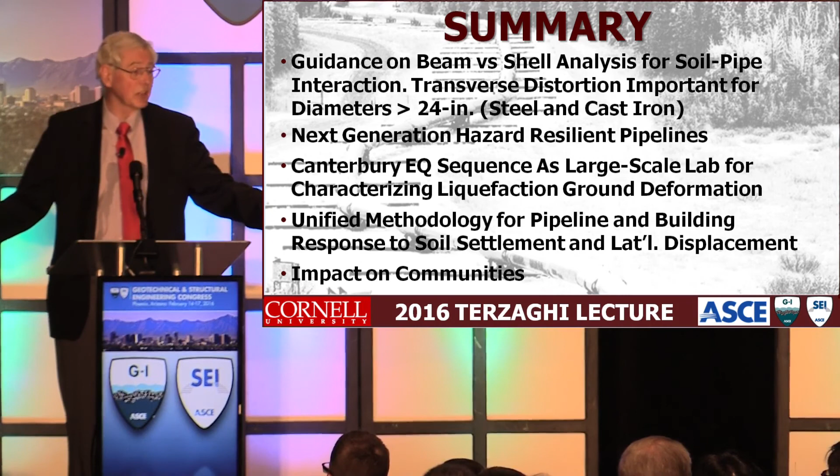But I think the most important of these is really the impact on communities. Everybody in this auditorium should feel proud because what you do has an effect, a positive effect, on a community or a neighborhood someplace. In fact, the very fact that we can stand in this structure without it collapsing and have a safety factor where we can have this meeting owes to our structural engineers. The very fact that the foundations are holding up owes to our geotechnical engineers. So when we look at system-wide response, and all components ultimately add up to systems, our contribution to those systems is immense and extremely important.

So in ending this lecture, I'd like to congratulate all of you for doing the great job that you do to keep our community safe and secure and functioning properly. I thank you profoundly.